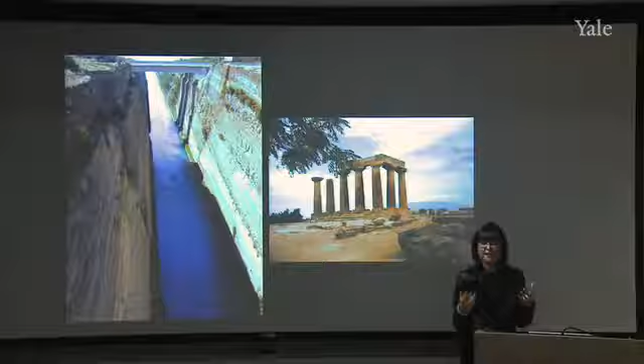So a Greek city, a very well-developed Greek city, that is eventually taken over by the Romans, and the Romans remake it in the Roman manner. They add typical Roman buildings to it, creating a kind of mini Rome in Greece, but it's interesting to see the way in which those new buildings blend with those that were built there earlier.

I also mention here not only the archaic temple at Corinth, but also the so-called isthmus at Corinth. You might remember from our conversation about Nero and the architecture that he built, that he was the one who built a canal at the Isthmus of Corinth. The canal that is still visible and used at Corinth today, which you see an excellent view of on the left-hand side of the screen, is essentially the same canal that was built initially, or begun initially, by Nero. So that gives you some sense of a Roman addition to the scene.

And I show you just one other example. There are quite a number of buildings preserved from Corinth, Roman buildings. So one could do, for a paper like this, an overview of the Roman city, all the pieces of the Roman city, how the urban fabric worked. Or you could choose one or two buildings at Roman Corinth to concentrate on.

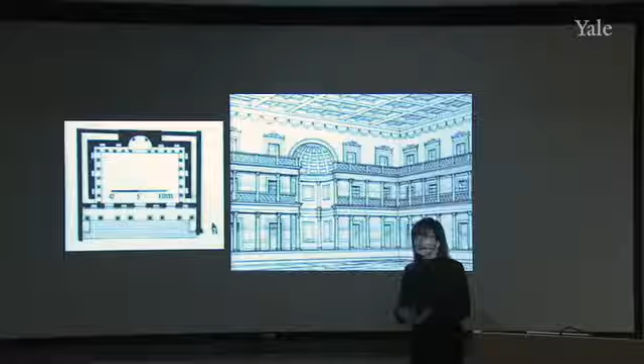This is the Library of Celsus in Ephesus. It is called after Celsus because a man by the name of Celsus, C-E-L-S-U-S, was the patron of this particular library, and it bears his name. He was the benefactor who wanted to splash his own name on this library, the purpose of the library being a library for everybody who lived in Ephesus.

We see a plan. These are both from Ward Perkins, a plan and also a restored view of the interior. In the plan, you see it's inside a rectangular space with a niche with columns in that niche, columns around the perimeter of the room, and then columns as well as a staircase on the front of the structure. In this restored view, you get a better sense of what it would have looked like inside.

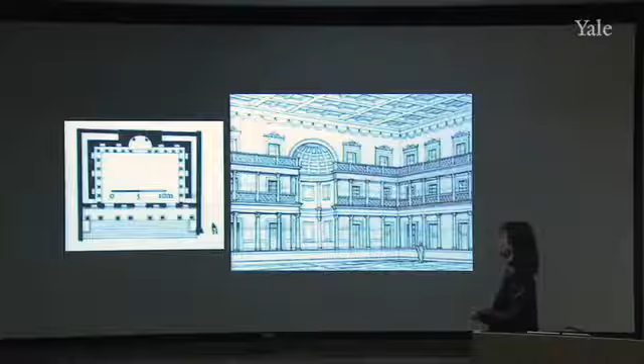You see that niche here. You can see now that it's a two-storied niche with columns on two stories and with a semi-dome with coffers at the top, and then a series of tiers with rectangular storage areas here with shelves where they placed this.

Remember, there were scrolls, not books, so they piled the scrolls on these shelves, and then each of these rectangular areas had a wooden door that would close and keep those scrolls protected unless someone wanted to check them out or consult them or whatever. We see it also had a flat roof with a coffered ceiling.

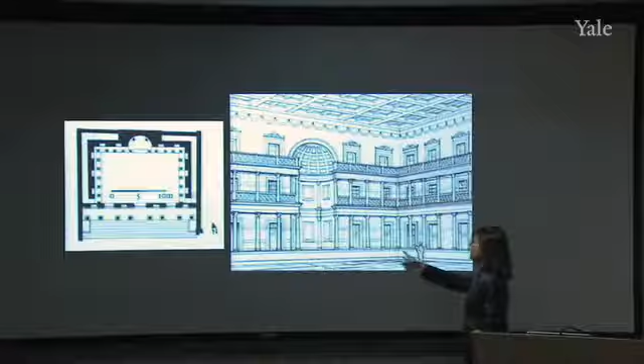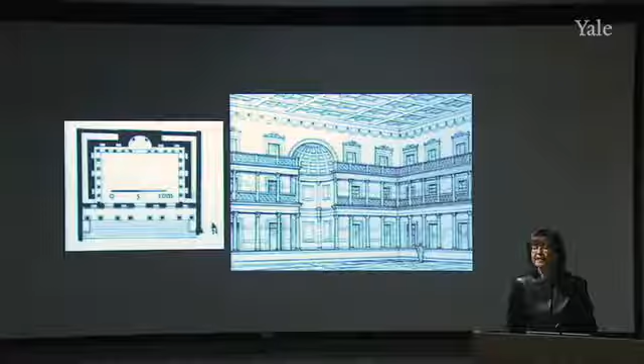Now, what's also very interesting about this library and essentially unique is that Celsus not only wanted to give this as a benefaction to his city for the public good, he decided he also wanted it to serve as his tomb. Now, I've told you that people made strange choices vis-a-vis their last resting places, and Celsus decided that he wanted to be buried in his library. So he provided, beneath that central niche, a burial chamber, and he was indeed buried in his library. So this is not only a library, it's also a tomb, which again makes it a particularly interesting topic, I believe.

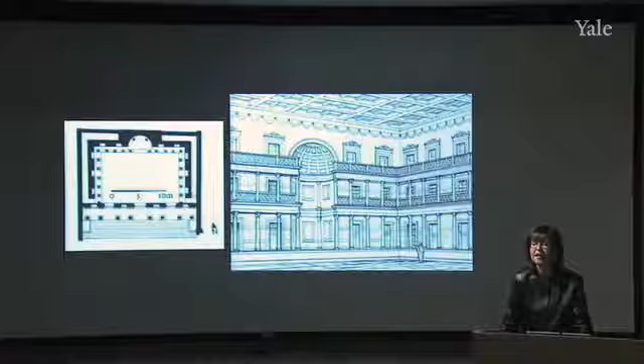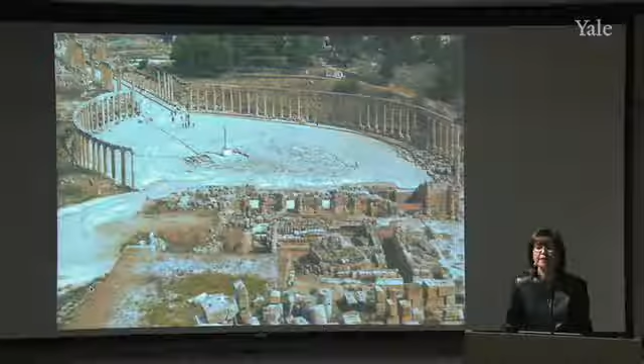An oval forum, a forum in an oval shape. Now, we've seen ovals before for amphitheater architecture, the elliptical plan of an amphitheater, and we've seen octagonal rooms and we've seen round rooms, but we have not seen the Romans in Italy use the oval for anything other than amphitheater architecture.

And yet we see here this wonderful forum in Gerasa that consists of an oval, which is defined essentially by a series of columns on a curve. So placing of columns, placing of the traditional language of Greek architecture along a curve, which we've seen before. We saw that at Palestrina, for example, but we see it here with this oval shape.

And the other thing that you see in this view that is so interesting is the fact that most of the streets in the cities in the eastern provinces are colonnaded streets, are streets that have columns all along them. We never, ever see this in Italy. There is no ancient Roman town in Italy that has a colonnaded street. So we begin to see these interesting differences between Rome and the provinces.

Why is this? It's interesting to ask ourselves why this might be. I think, again, it probably has to do with the fact that there was a long tradition in Greece and in Asia Minor for Greek architecture made out of stone using columns for the most part. And that was something that they were used to. They liked it. And they continued it on, but they began to do it in a different way.

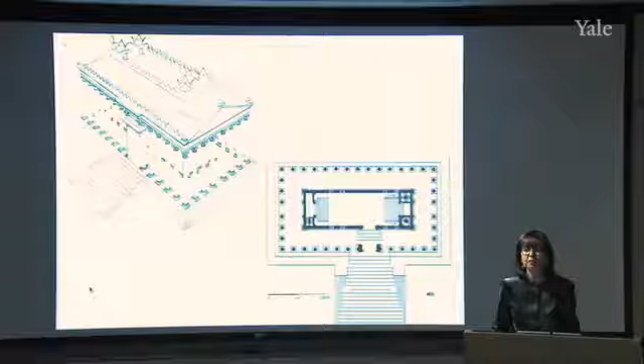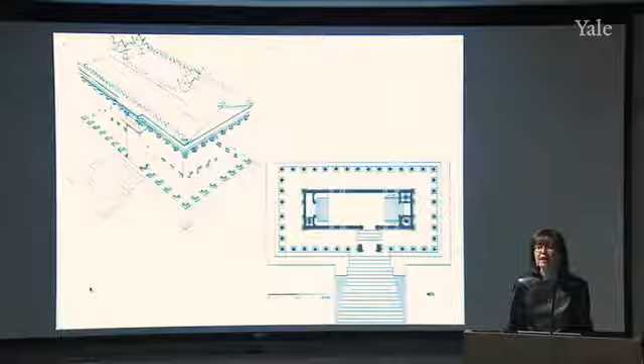But the building, again, in Palmyra that I think is by far the most intriguing and makes a perfect paper topic, because one can try to decode which aspects of this are Roman and which aspects of this are local. And that's essentially the name of the game when you go out into the Roman provinces, to try to determine in what ways what's going on in the capital had impact on what's happening in the provinces, and what local traditions are so strong that they continue to exist and even resurface in some of these buildings.

It's usually a coming together of both of those elements from Rome and local elements, and the way in which those coexist and end up creating an entirely different architectural phenomenon, which is what we see in this building here. This is called the Temple of Bel, B-E-L, at Palmyra, again in modern Syria.

And you say to yourself, well, who is Bel? Well, Bel is a god, and that tells you something already. Bel is a local god. So this is not a temple to Jupiter or to Jupiter, Juno, and Minerva. This is a temple to Bel. So that already tells us something about this structure as it goes up in Palmyra during Roman times, that they are interested in commemorating and honoring a local god.

If we look at the plan, and maybe you can help me here with this, if we look at the plan and we think back to what we know of typical Greek, Etruscan, and Roman temple architecture, we should be struck by this plan. What is it that strikes us? What elements strike us about this particular plan? Anyone? Yep. The porch, the staircase, the podium, you mean?

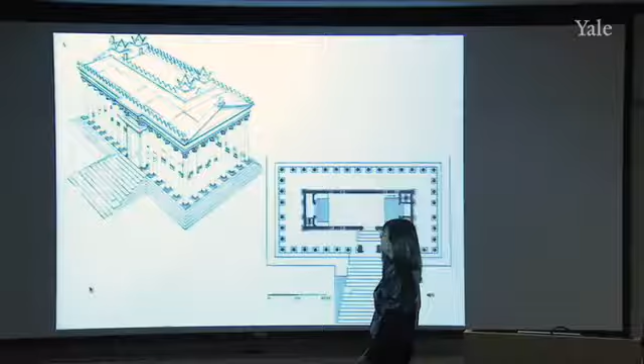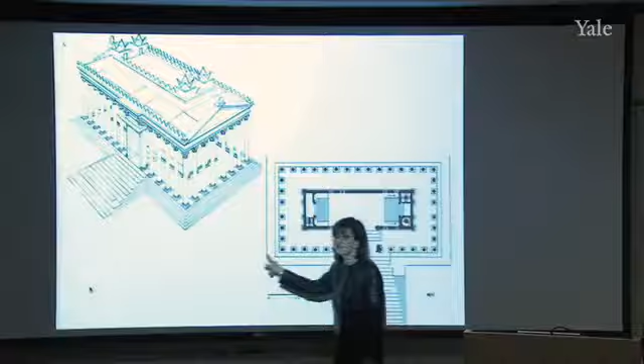The cella. The cella is here. We have a single cella. We have an additional staircase on one side, which leads into the cella from the side, not from the end, as we usually see. You usually enter from one short end, and you have the apse or the place where the god statue was kept on the other side. But here we see a staircase that's placed in the center, and it isn't even quite in the center. It's actually slightly off center on one of the long sides of the temple, which we have never seen before.

So we have this interesting location of the other staircase, but also this combination of a staircase that goes all the way around in the Greek manner, but then a kind of facade orientation by the placement of an additional staircase on one side of the monument. So a very schizophrenic building in that regard, and the list goes on and on. Let's look at the restored view. What do we see here that's curious? Anyone?

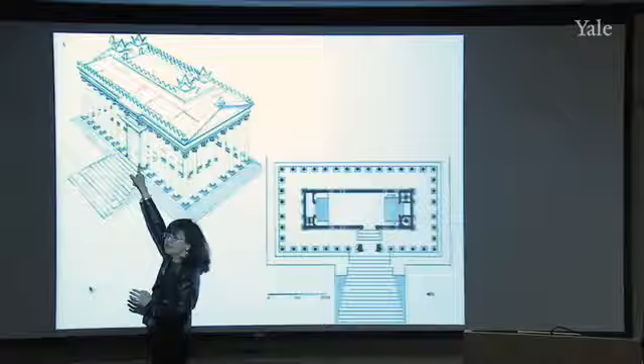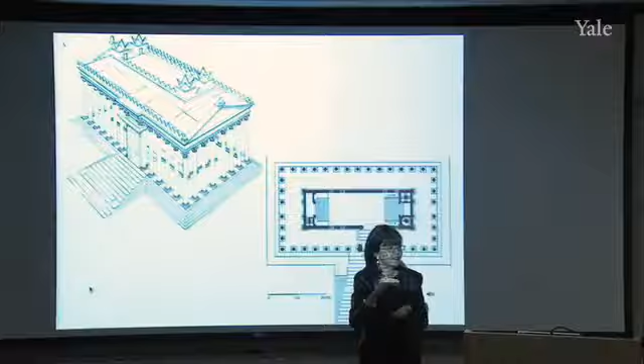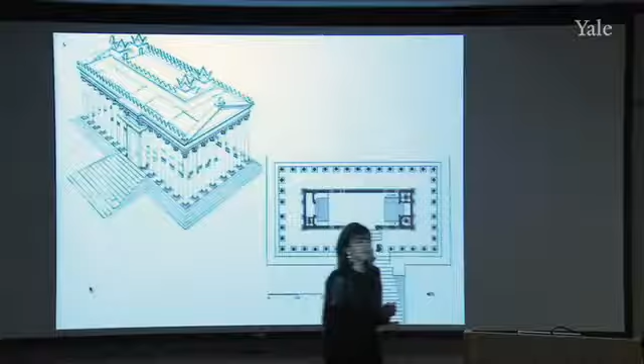We have tall columns with capitals. Look at the doorway. Can you see? I don't know how clear it is to you from where you sit. What's happening above the doorway? We have the upper part of the column and the capital truncated, placed on top of the doorway. That's strange. How are we meant to read that exactly? We've never seen that before. And look at the top. We have crenellations on the top of the monument. And at the very top, we have some kind of a deck up there that may have been used for something having to do with the worship of Bel.

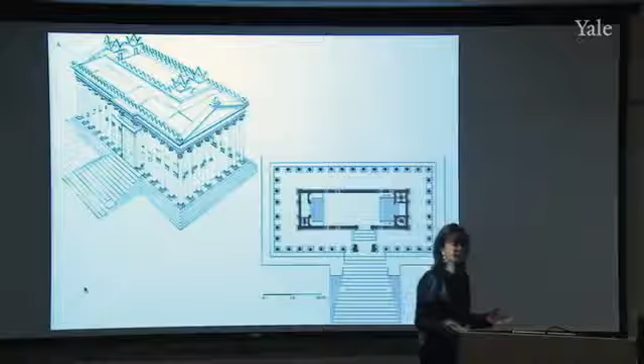So we see this interesting combination of the influence of Greek temple architecture, Roman temple architecture, and local practice. And so one would try to find out what one could about the worship of Bel, and about whether there were any earlier temples of Bel here, and whether any of these features have to do with local practice. The building still stands, or part of it, and you can see it here. Here you see that doorway that we were looking at just before, some of the columns, and you can see the very nice honey-colored stone out of which the Temple of Bel was made.

Another terrific topic, and for anybody who lives on the West Coast and is going home to the LA area for break, you probably have already been to the Getty Museum, you could go again, but if you have never been, this would be a perfect time to go. The Villa of the Papyri in Herculaneum, a villa comparable to some of the villas that we've looked at this semester, whether it's Boscotrecase or the Villa Jovis on Capri, a very important villa in Campania of the early Roman period.

The Villa of the Papyri is so called because of papyrus fragments that were found there. The owner of this particular villa had his own library. We're back to libraries again, and by the way, on the bibliography, there's a particularly good book by Lionel Casson, C-A-S-S-O-N, on the libraries of the ancient world that anybody who works either on Ephesus or this will probably want to take a look at.

He has his own library here, and there were scrolls from that library, especially from one specific author, that were found there, and it is because of those papyrus fragments that the villa got its name, the Villa of the Papyri in Herculaneum. The excavations were done some time ago of this villa. A plan was drawn of the villa at that particular time, but the excavators found that noxious gases were starting to be emitted from the ground, and it was a health hazard. And so after they unearthed it, after they drew it, they covered it back over again.

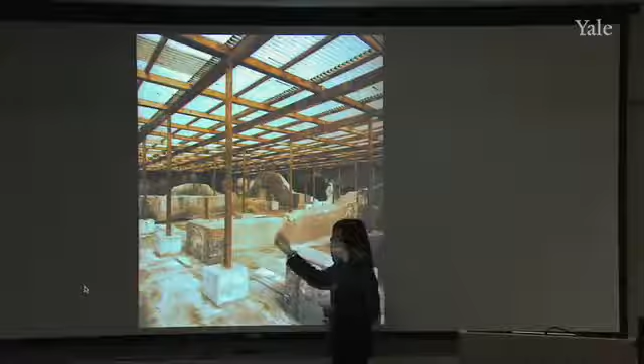And it's only been in very recent years that excavation has again begun on the site, and I show you a couple of views of the excavation that is currently underway that is once again revealing some of the original walls as well as some of the stucco and paintings of the original villa. Now what's particularly interesting and where the Getty Museum comes in is J. Paul Getty, when he designed his villa at Malibu, which serves of course as a museum of antiquities, he used the Villa of the Papyri as a model, and I mean as an exact model. He really duplicated quite precisely the Villa of the Papyri.

This is the plan of the Villa of the Papyri as it was drawn when it was originally excavated. And you can see, of the structures we looked at, it's probably most like the house of Loreius Tiburtinus, where you'll remember a small amount of space given to the house on 2 stories, and most of it given to a large garden. We see the same idea here, where we have one area around a court that has living spaces on the 2nd story, and then the rest of the villa is taken up, in this case, by a hugely long pool that has statuary and the like around it.

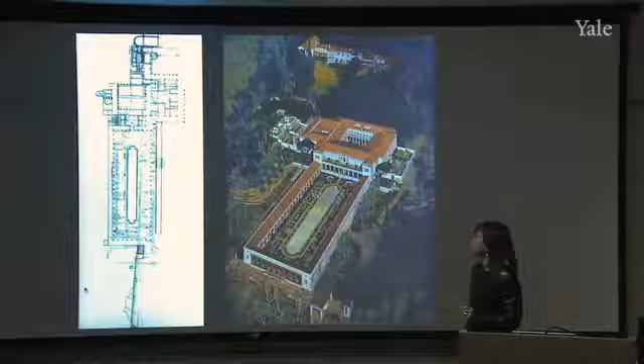Now, J. Paul Getty decided to use this Villa of the Papyri as the model for the Getty Villa. And this is actually a painting of the Getty Villa that you see from the air here. And you can see that it is almost exactly the same in plan as the actual Villa of the Papyri. So going to the Getty Villa, and this is of course a view of that long pool at the Getty Villa, going to the Getty Villa is like going back in time to the Villa of the Papyri.

And I know a lot of people think this is sort of Disneyland in Malibu or a Roman version of Disneyland. Yes, to a certain extent, but the truth of the matter is you will get a better sense of what a Roman villa looked like in Roman antiquity from going and looking at the Getty Villa than you will get from going and looking at the Villa of the Mysteries at Pompeii. Only because they have restored, because it is in such good condition, and because they have added to it the kind of plants that would have been used there.

The paintings are in good shape. They've placed statuary, actual copies of the ancient statuary that would have been at the Villa of the Papyri, because hundreds of statues from the Villa of the Papyri have survived, and you can see them all at the Getty. I'm going to show you a few views of this because I think it's such an interesting topic. I mean, I think one could write a very interesting paper on the original villa as seen through the eyes of the Getty Museum. For those of you who have either been there or have never been there, just a few views.

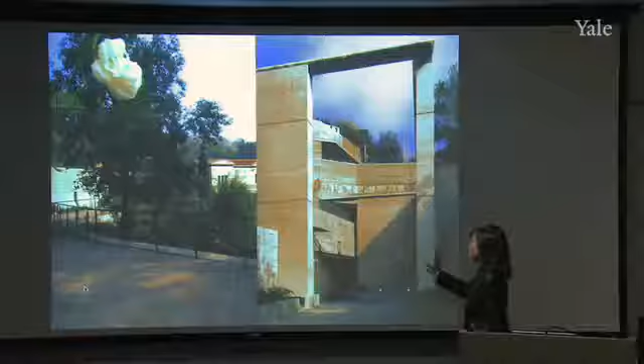The entranceway into the villa today, one of the ramps. If you saw this a few years ago and haven't been back, they have made some additions in the last several years, including their version of an ancient theater, which you can see here with the cavea and with the cunei, or wedge-shaped sections of seats, and 2 very good restaurants up above.

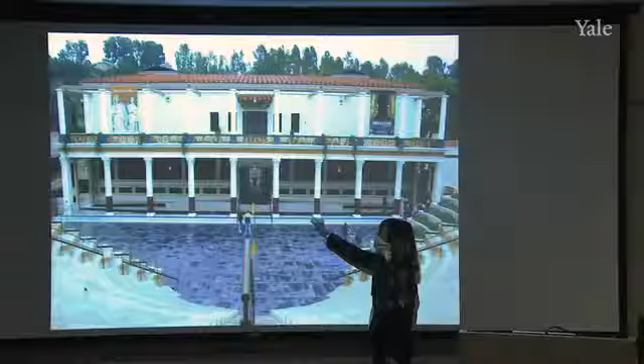This is a view standing on top of the cavea, looking down toward the orchestra and the stage building, which is part of the Getty Villa itself. It's very accurate, though it looks a bit too new. They've even used the typical columns with white tops and red bottoms that we saw as characteristic of architecture in Pompeii and Herculaneum, and a pool with famous copies of bronze dancers from Herculaneum. I'll show you the originals in a moment.

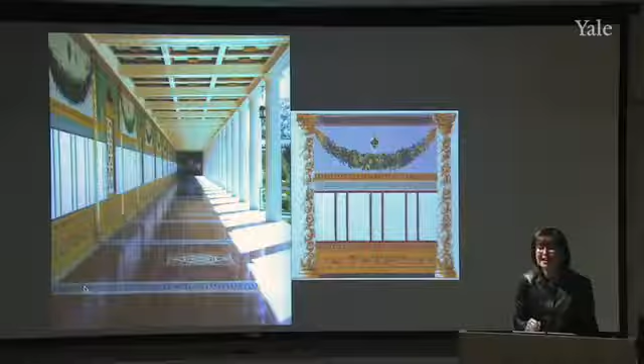This is the Getty's version of first-style Roman wall painting along the walls. It's not quite the same, but it conjures up what one of these walls would have looked like all the way along a corridor. They also have second-style Roman wall painting. These mostly look at the villa, but for the paintings they used other models too—this is a very Boscoreale-like motif with garlands on the columns.

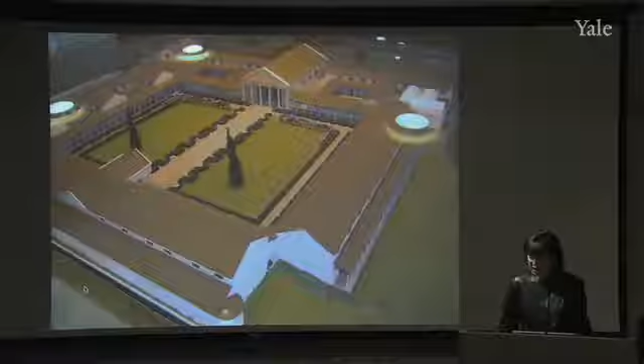If villa architecture is your thing, but you're not interested in the Getty or in Herculaneum, but are an Anglophile and want to do something in England, I've got two British topics. We're not going to look at Roman art in Britain, so for any of you particularly interested in art in the British Isles, this might be a good topic. I have both a villa and a bath.

This is the Roman villa at Fishbourne in Sussex, England. It's a model of what that villa would have looked like, and you can see it has a lot in common with the Templum Pacis in Rome, with its great rectangular space and one of the buildings pushed back against it. But one question to ask for buildings done somewhere other than Rome is how close this is to what's going on in Rome contemporaneously, and what is different, what has to do with local practice.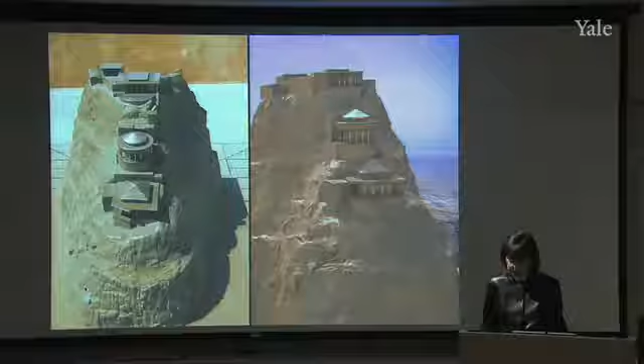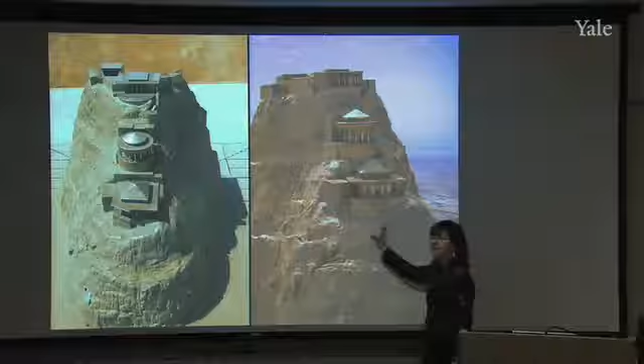The particular aspect at issue here would be to look at Herod's palace, the great Herod, about whom much is known, a very interesting historical character who was around in the 1st century BC, the time of Julius Caesar and Cleopatra and so on. His palace at Masada, built on the top of the peak, is particularly interesting. Given its date, it's roughly contemporary to the things we saw going on in Italy at Palestrina and at Tivoli, the placement of, in that case, the pouring of concrete on a tiered hillside.

Use of different materials, as you can see here, in two views of what the palace of Herod on Masada would have looked like—again a tiered, multi-tiered structure, roughly three tiers.

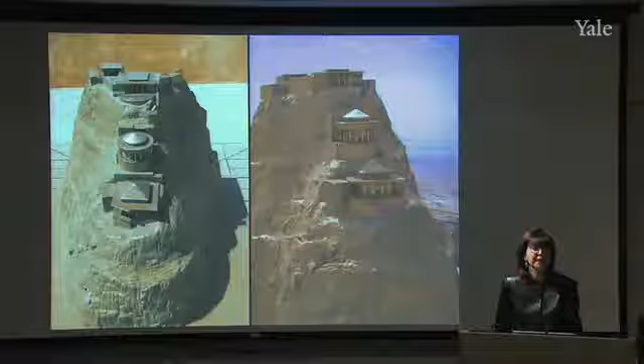So the question here is, what did he have in mind? Why did he put it here? Why did he choose to represent it as a kind of cascading structure from top to bottom? How does it compare to Palestrina and Tivoli? What is it made of—concrete or something else, and why in each instance? What kind of architectural elements are used in this particular case?

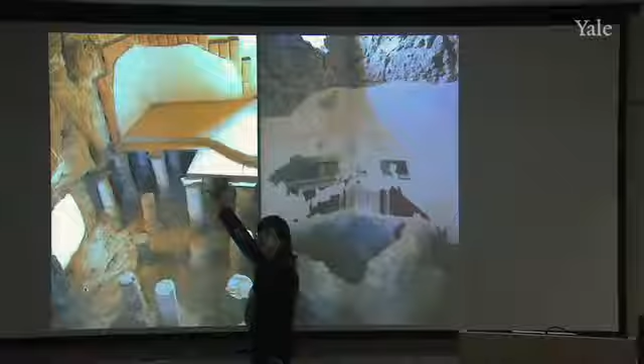If I show you a couple of details, you will see that Rome is not too far away, in the sense that once again we see a hypocaust system being used to heat the floor of this particular room in Herod's palace. Was this a bath or was this something else? Remember, we saw the hypocaust also used to heat the floor of Domitian's dining room in his palace in Rome.

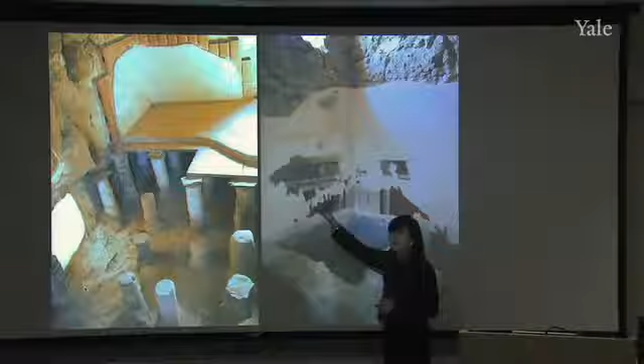And then over here, look—wall painting very similar to what we see in Italy at roughly the same time. This is again BC, so we're talking about first and especially second style Roman wall painting, or the transition between first and second style.

Tombs are particularly interesting as a topic because they're so varied and have so much to do with the particular patrons who commissioned them. I showed you fleetingly the two tomb streets at Pompeii, the Via dei Sepolcri and the Via Nocera, and told you we would concentrate instead on tombs in Rome. But they make a very interesting paper topic for someone who'd like to think further about Pompeii and the variety of tomb architecture there, which varies from tombs that look like houses to tombs that have columns in the second story with statues interspersed among them.

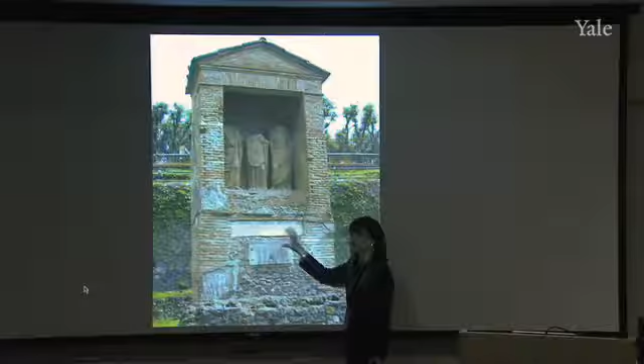To tombs that again have a niche in the center with statuary—unfortunately headless here—but preserved inscriptions. So if you want to get into who these people were, what we know about them, a kind of cultural study, you could do that.

Residential architecture in the Roman provinces: the houses in France at a place called Vaison-la-Romaine, Vasio Vocontiorum in antiquity. The French tout this as the French Pompeii. It is far from the French Pompeii, unfortunately, because it doesn't have all of those public buildings—no amphitheater, no theater, no Odeon, and so on.

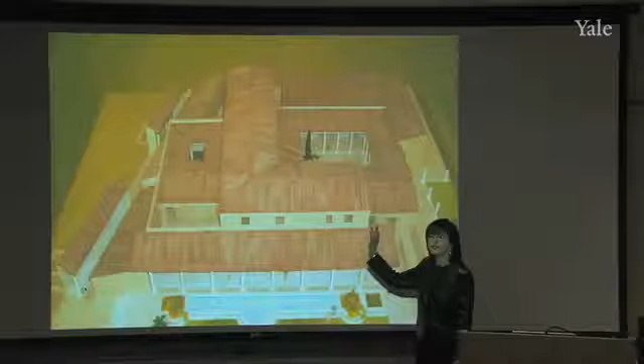But it does have some interesting houses, not as well preserved as those in Pompeii, but still interesting to look at. This is a model of one of them showing the same sort of elements we've seen in Italy: the peristyle—this is the Hellenized domus type—the peristyle court here, the compluvium of the atrium here, and down on this end a colonnade with a pool in front of it. Very similar to the kinds of things we saw in Pompeii.

Option 2, I'm not going to go into in any detail, but you'll see when you look on the website for option 2 that that's called select a building, select a theme. If there is nothing here that you liked, but you do want to do a research paper, and there is some building that you've seen on your travels that we haven't talked about in this course, or even a building that we have talked about in this course, but talked about in a few minutes' time, that you would like to write a paper on for some reason, you may do that. And you would do it in the same way that you do the first one. It would be a research paper.

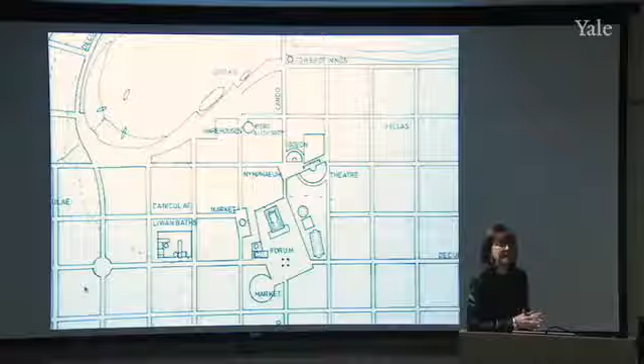You can build this anywhere in the Roman world that you want. So if there's a particular place you've enjoyed vacationing and you want to put it there because you know that place well, that's fine. And you can almost do anything that you want to do. You can be as creative and as zany as you want to be as you do this.

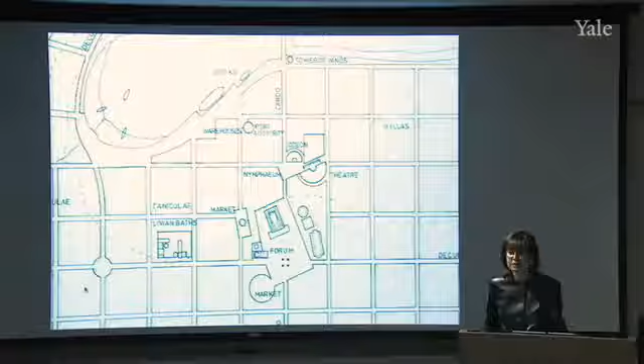The only thing that I ask, and you do need to do a paper along with this as well, is that there need to be drawings, which are either hand-drawn or computer-generated. That would usually include the city plan itself, although it doesn't have to, and a selection of buildings. So it's going to take you some time to do. Obviously, if you're skilled at drawing or you're an architecture major, you're going to be able to do this more readily than someone else.

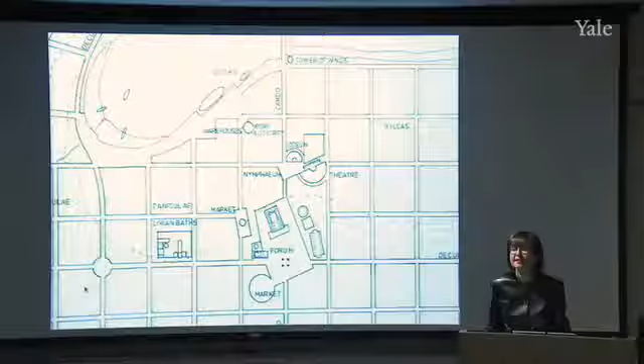But I just want to urge those who don't have, we had one project with basically stick figures one time that was really fantastic. So, I mean, even if your drawing skills are not great, it's the ideas. Will we be impressed by great drawings? You bet we will. But I don't want to discourage anyone for whom drawing is not your forte, because I think it's really the ideas that count, the creativity that counts here.

But you can choose any location. Oh, I mentioned that there's a paper that has to describe the colony, the reason for its construction, giving its name, and again, be very creative here. Its date, its location, Italy or the provinces. You can pretty much put anything you want in these cities, but in that paper you have to explain why.

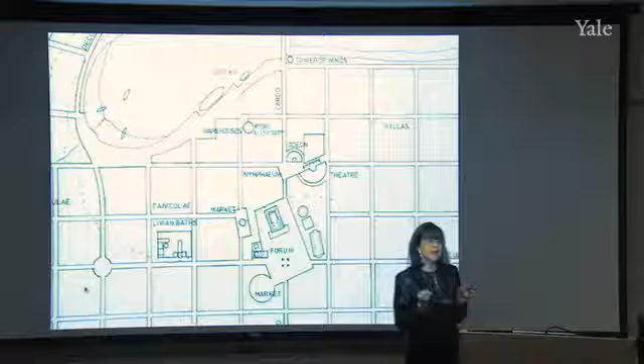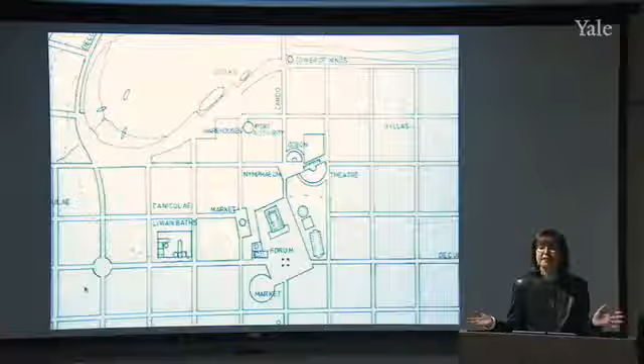For example, if you were to build a town in Asia Minor, and it were to be filled with concrete buildings, which none of these towns were, you have to explain why this particular town is filled with concrete buildings. And you can come up with as crazy an explanation of that as possible. In fact, the crazier the better. But you need to explain something like that so that we understand that you know there was no concrete architecture in this part of the world, but this particular town is special because of the following reasons. So I think you can see how your creative juices can flow.

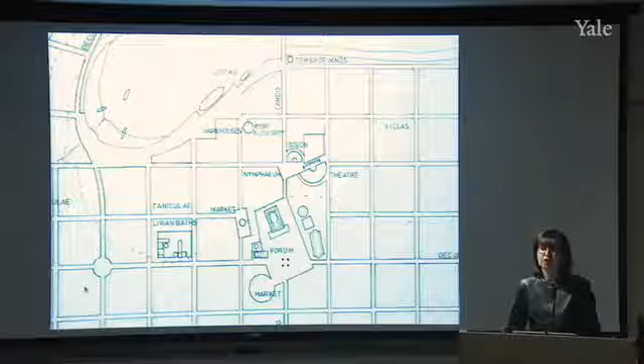I just want to show you very quickly in the 5 or 6 minutes that remain a series of these that were done by students over time, and I hope they won't be intimidating, but rather serve as an inspiration. There are a couple of them along the way that were done by students of architecture that are particularly good in terms of the drawings, but others you'll see are quite simple, and I want to show you so that you're not intimidated by this particular topic.

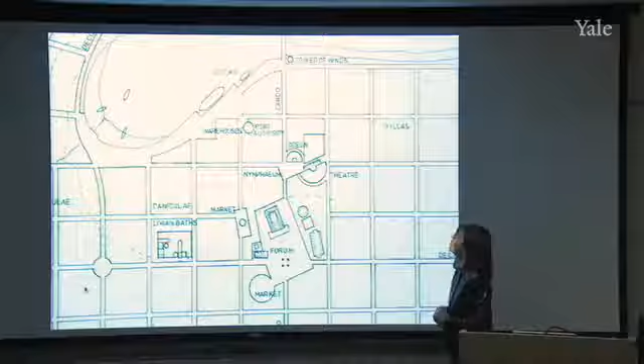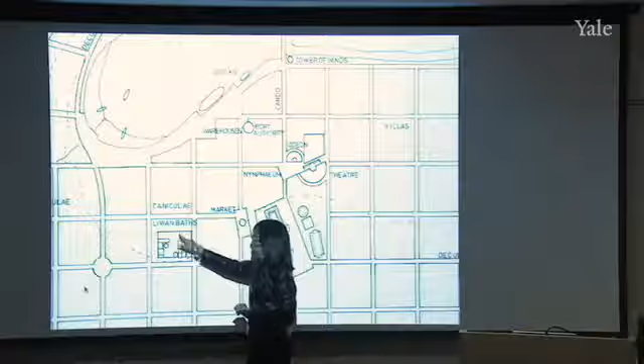This is a wonderful city that someone created on a harbor. You can see the docks. You can also see the Port Authority that has been added here, as well as the warehouses. There's some misspellings like Canoculi over here, Livian Baths, I guess after Livia. But look at this wonderful forum where we have a temple pushed up against one of the back walls. For some reason, there's a tetrapylon in the middle of the forum, which kind of works for this street, but I'm not exactly sure where it goes here. But it's an interesting motif.

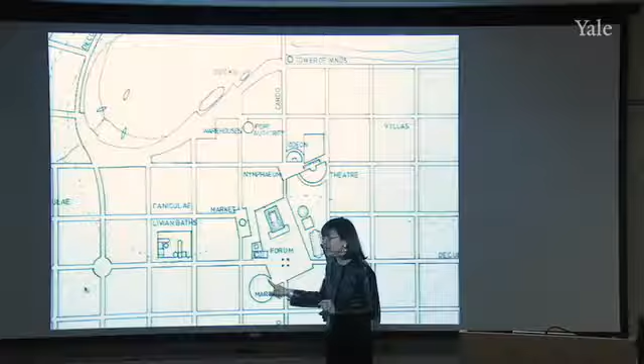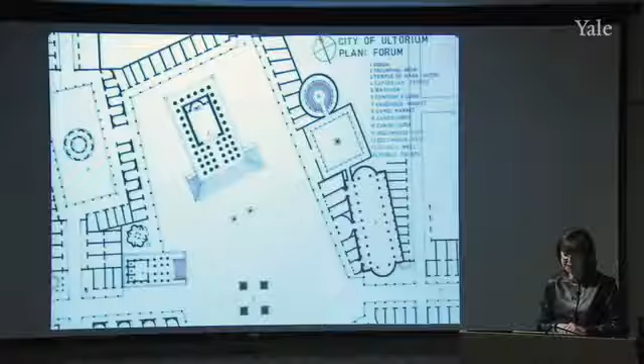And then this market, this sort of interesting circular market that kind of projects on one side, creating a very interesting shape. Gives you some idea, but a very regular plan, as you can see, for this particular city. This was done by a graduate student, actually, in the architecture school. They're very extraordinary drawings, and it was a huge plan. But just to show you again how creative it was, the city of Ultorium, after Mars Ultor, of course, and you can see some wonderful motifs, all of them identified here.

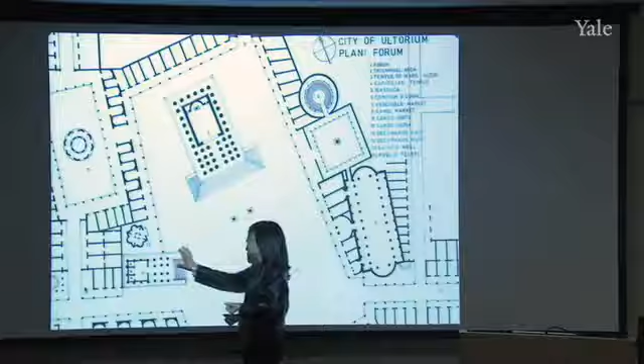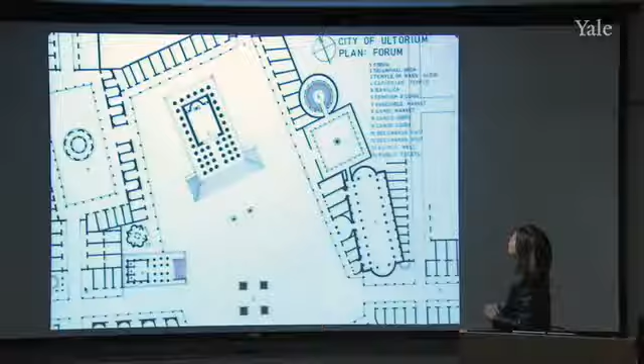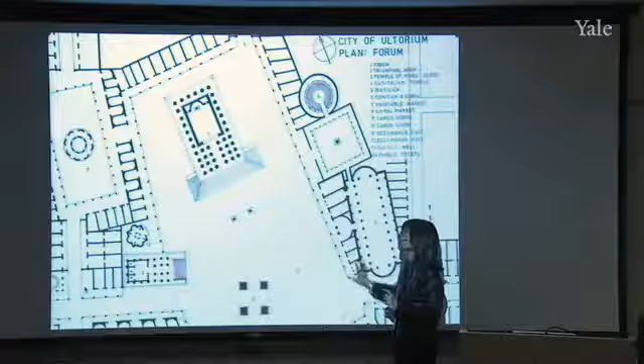This large temple, a tetrapylon. There's always a fascination with tetrapylons in this project. Some other structures over here, including a marketplace at 7. But I love at 6 the curia. You never see a round curia, but this is a round curia, which is absolutely terrific. Opening off the basilica, which you see over here, which is very closely based on basilican architecture of the Trajanic period and into the Severan period. Some interesting wedge-shaped shops over here. So again, it gives you some sense of what's possible.

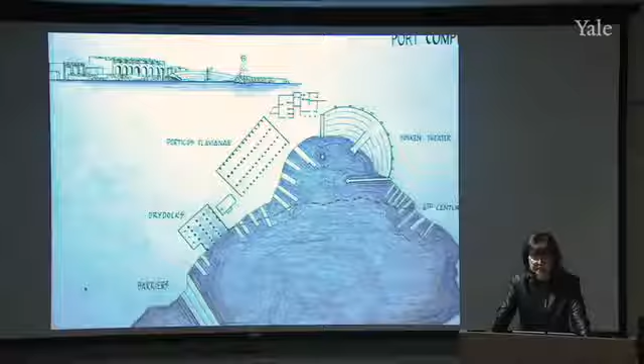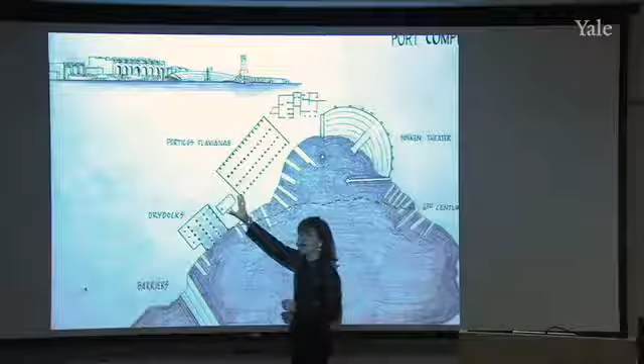This not by an architecture student, but another one of these port cities that has, I love this, the sunken theater. You can see the sunken theater that goes right into the sea over here on this side, as well as the port. You can see this was a Flavian. So again, you've got to decide where you want to put it, which period, the Flavian period. So a Flavian port city.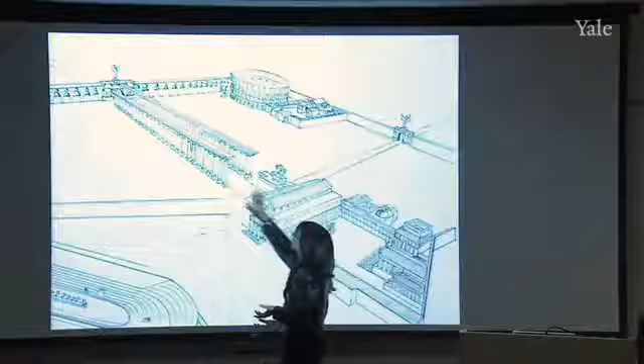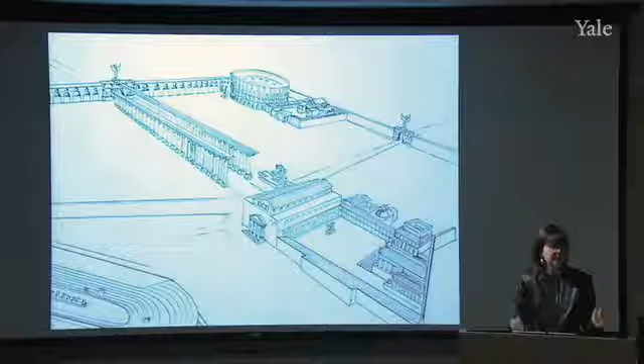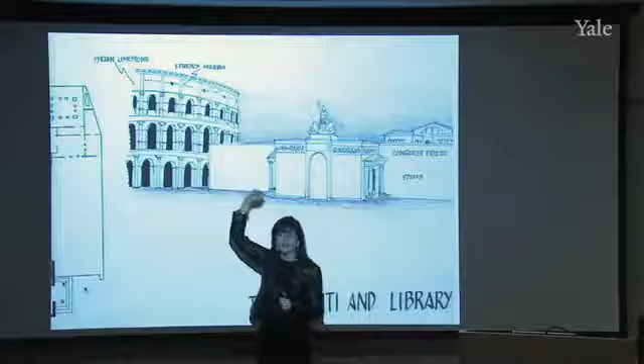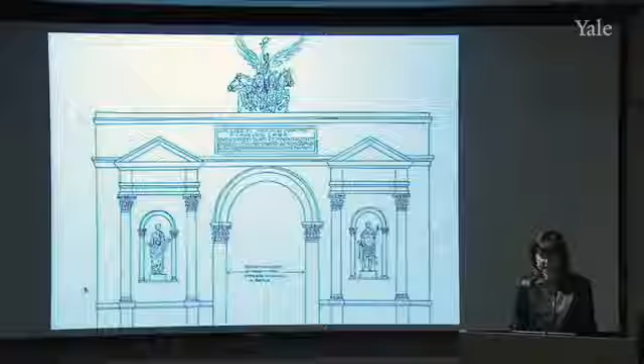But I love this because the person has identified the stone. You know, in the amphitheater here, a stone has been imported from all over the world, from Syria and from Ephesus, to be used in this particular structure. An arch. Again, I think also this was a very ambitious project, an arch from that same project with a victory at the top and an inscription. And then this, the Victory Gate, again with the amphitheater in the background.

This was something simpler but interesting. A small fountain, composite capitals, coffered, misspelled, apse, a philosopher pose of Titus, scalloped pool with the triple basin. This one, very simple and very derivative in a way, but I love this one anyway. This house plan shows us that the person was basing it on which house? It was actually on the exam, although you didn't see the plan.

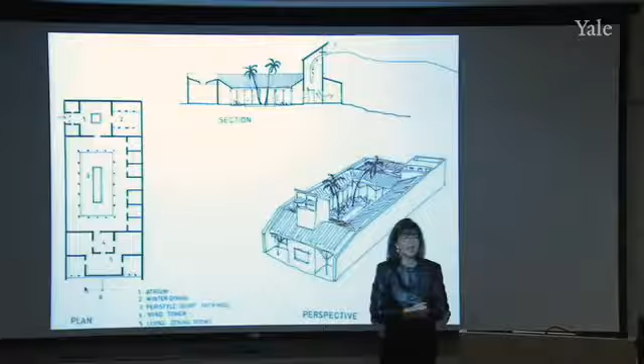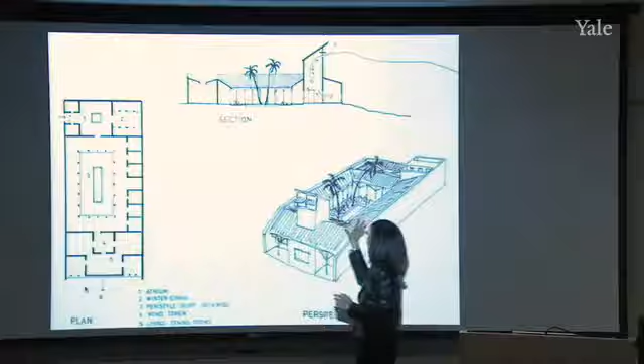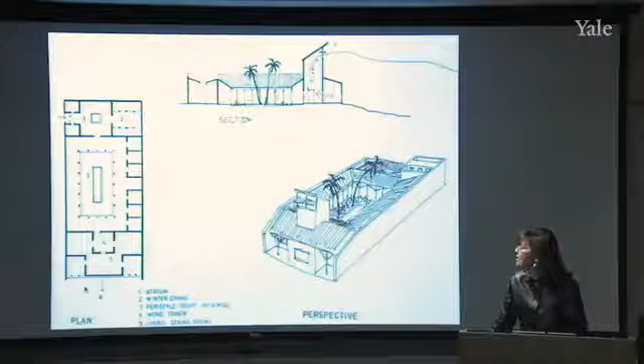House of the Mosaic Atrium, because remember up at the top, the entranceway, the atrium, and the oecus at the far end in the form of a basilica. So, you know, very derivative plan, but I just love this touch. Just this touch did it for me. Sticking those two palm trees in the center of the peristyle court was great. And I forget again exactly where this town was, but it had something to do with the kinds of flora and fauna of that particular part of the world.

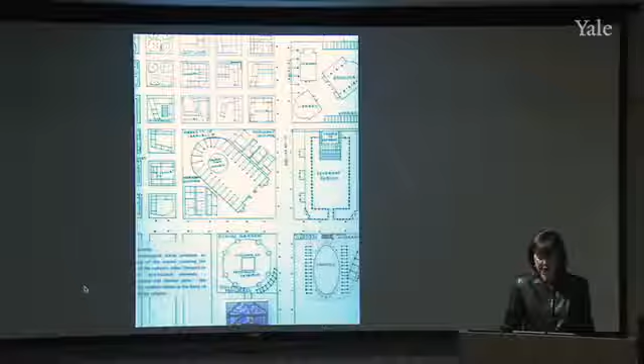This was another wonderful one, a big city plan, a huge piece of oak tag with the entire city, a city of the Severan period, Septimius Severus, with buildings honoring him and his son, Caracalla, for example. But this one, because Septimius Severus's wife was particularly interested in astrological signs and used to tell him each day what his day was going to be like based on those signs, the student incorporated elements of the Mithraic mysteries and those astrological signs, as you can see here, in many of these buildings, in Mithraic garden and so on and so forth, which was really wonderful.

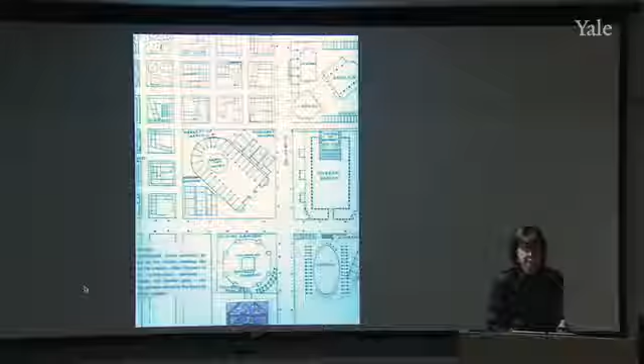And this, my absolute favorite, still to this day. This was done probably in the early 80s when I began teaching a version of this course, by a student who is Petrus Greenbergius, Peter Greenberg, who presented his project in the form of a scroll. He knew very well there were no books at this time, there were scrolls. And so he presented this long scroll. I can't even imagine how long this text took him to write on this scroll.

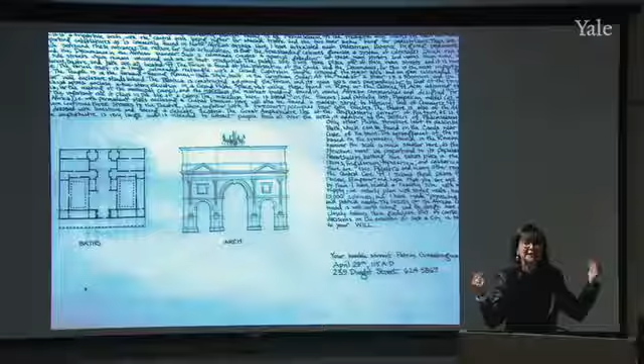But it was a long scroll, and it was tied up with a nice ribbon and so on and so forth, and you unfurled it, and it had the text all about his town, and he was the architect, if I remember correctly, the designer, and he was presenting his case to the emperor, or to the empress, and like, you know, me. So he was presenting his case to me about this city that he wanted to build, and was I going to give him permission to build it. So interspersed with this text were these wonderful drawings of what he had in mind.

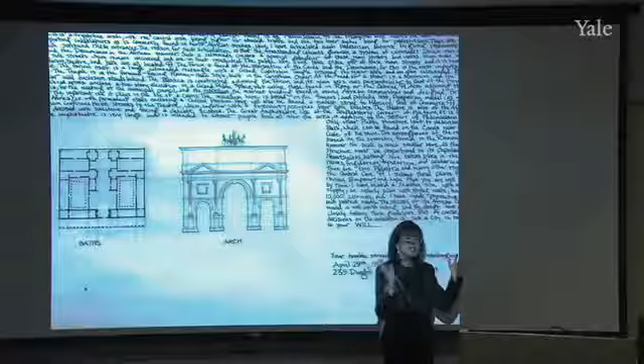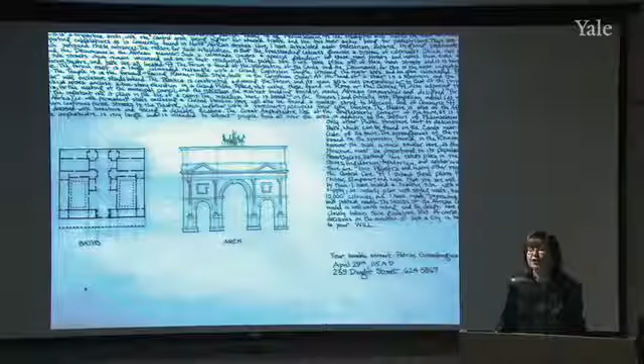So, I mean, there are so many. This is one of many, many wonderful ones that I've gotten. I hope this will be inspirational to you. I can't say have a great break quite yet, because we have class on Thursday. But I know you're all looking forward to it, and I hope that your travels, even if you're just going to the beach in Cancun, can include in some way some thinking about buildings and about this project.